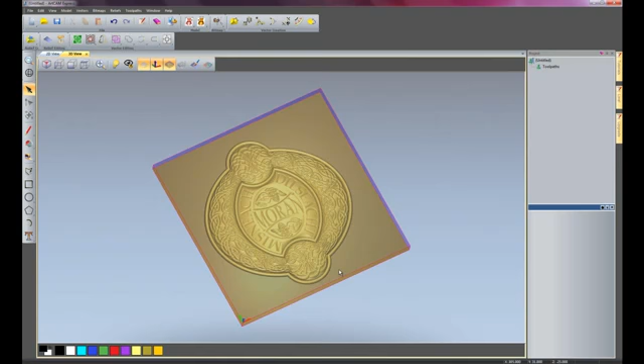So I'm going to select Relief Clip Art library. I'm already in my signs library, so I'm just going to use this Celtic sign here. I'll just zoom out. This is quite large, so I'm just going to press Shift and Alt and then just scale it down. This will keep it in perspective. Just scale it down to there and then just press F9 to center it and then click Add and Paste. I can now close this dialog box and also close my Relief Clip Art library. If I now go onto my 3D view, there you can see I have my sign in place.

So I'm going to select toolpaths and I'm going to select here under 3D toolpaths, create machine relief toolpath. This opens up a new dialog box which I'm going to tab onto the right hand side. The area to machine, instead of the whole relief, because I don't want it to machine all of this flat face as I want to cut this part out afterwards, I'm going to click selected vectors and I'm going to toggle my vector visibility on. Here you can see I have the vector for the outside shape and I'm going to just select that. I want it to machine inside the vector.

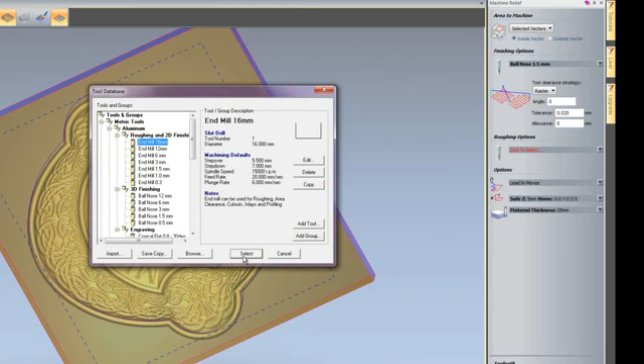The finishing options, I'm going to use a 1.5mm ball nose cutter, and the roughing options, I'm just going to blast away most of the material using a 16mm end mill, and then just click Calculate Now.

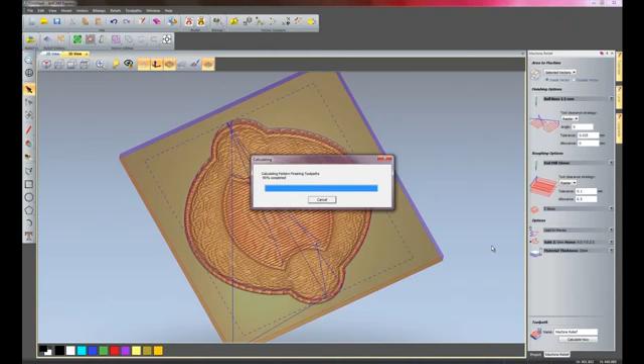So there we have the toolpaths for this particular part. I could also use different strategies. The raster that we're using here is based on the PowerMill toolpaths. Here we have Raster Classic, which is the ArtCAM old raster toolpath strategy, and we have Raster X and Y. What this does, it creates a toolpath going one direction and then 90 degrees to that.

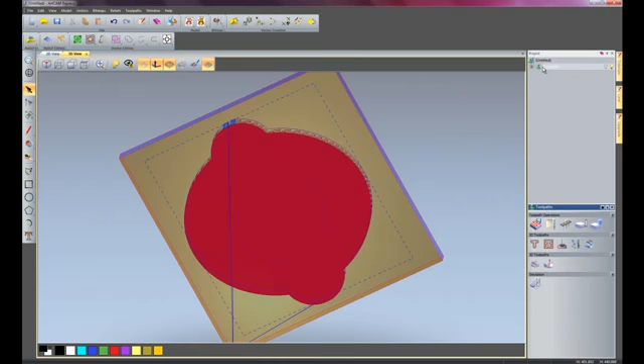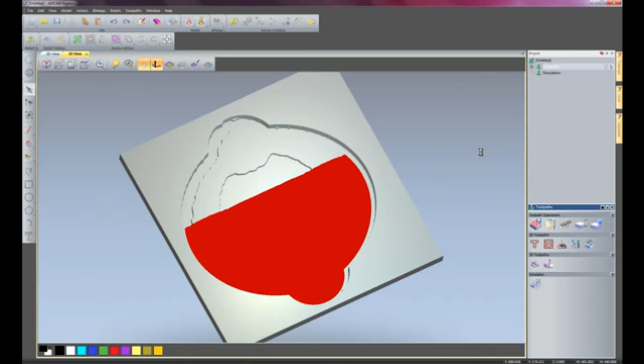So I'll just close this dialog box down here and I'm just going to simulate this toolpath just so you can see what it looks like. There it's doing the roughing toolpath and now it's creating the finishing toolpath. And there you can see our finished part.

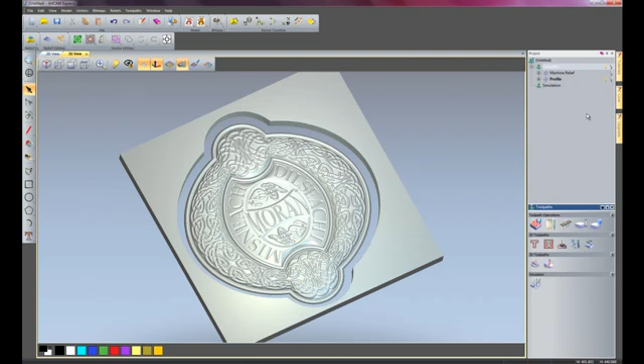Finally, I'm just going to cut this piece out. So I'll still have my outside vector selected. The finished depth is automatically the material thickness, which is 25mm, and the profiling tool, I'm just going to use the same 16mm end mill and then click Calculate Now. I close that, and if I open up my toolpath tree, I can just right click on profile and then just simulate this particular toolpath. So let's cut that out, and that's our final piece.